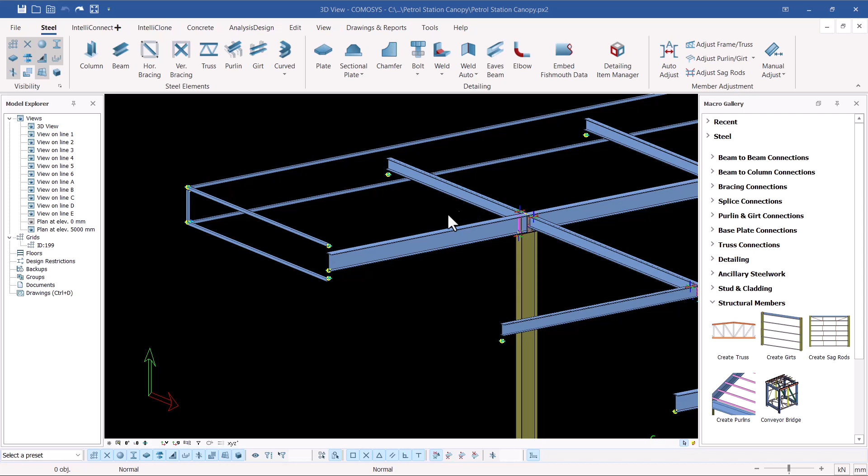Hello, welcome back. Today we want to create a girt along the edges of this simple roof of our petrol station canopy. This girt will just offer support for the roof trimming facade of this simple structure. There's still a lot to be added, but I'm just creating the profile to trim the edge of this particular shade of the petrol station.

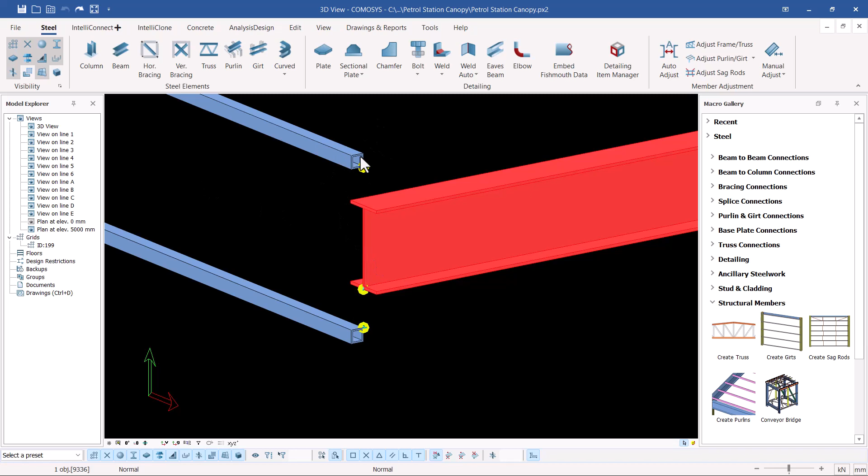I had created this previously, and it's quite easy to create. To create this, there are many options. You can just create this member at the center, then offset it with half the distance of this, then again the half distance of that going downward.

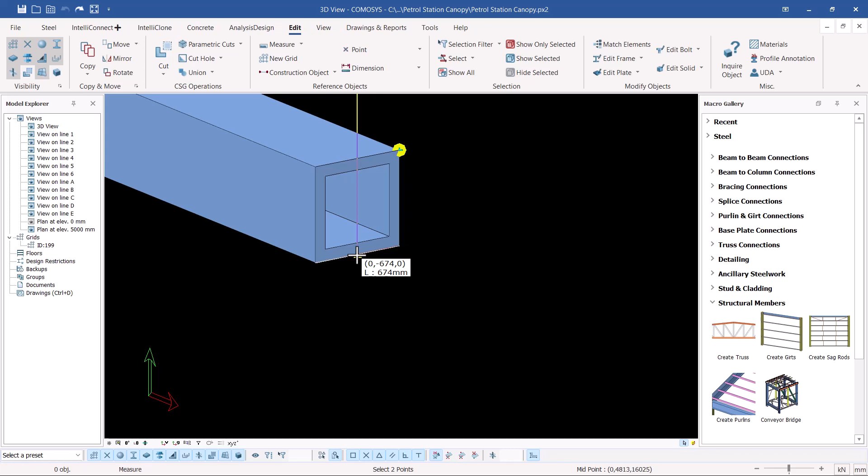Let me show you the distance here. If I come to edit and come to measure, and pick on measure distance, I'll snap on top of this member and move all the way to the bottom end, just to snap over, mouse over any point there, and you'll see it is 674. So this is the distance I'm talking about, that if you offset it by half that 674, you'll get to this position, and you'll get to this position.

You'll do the same to the other end, and this should be something you should be checking back and forth. That's why I did it beforehand, because I'm trying to cut down on training time.

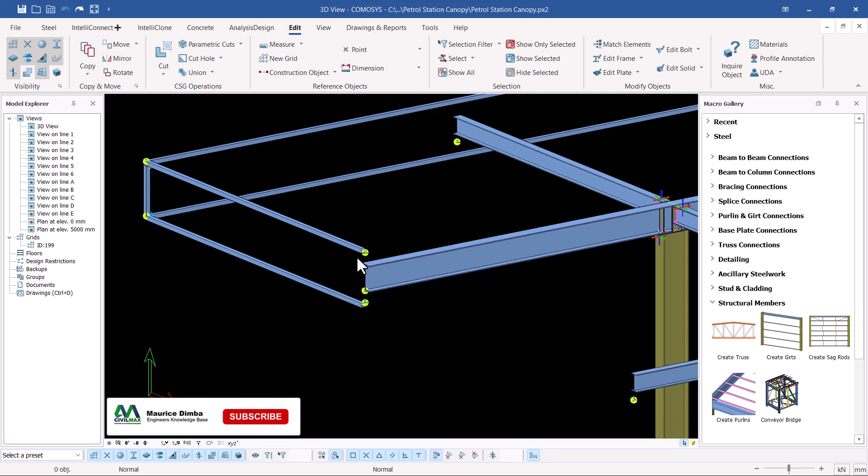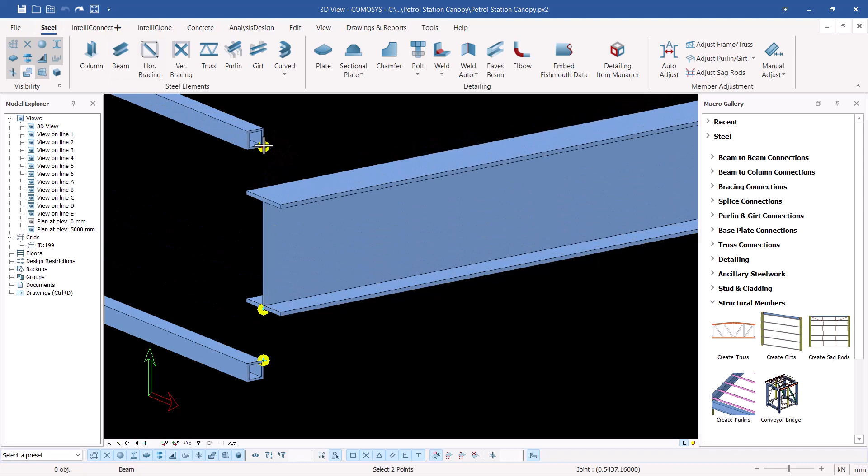Now there are two options. I can join these two frames by using the edit tool and coming to join frames, but I've used that several times. So there's also another way of doing it if you're a beginner - you can go literally and come to steel, come to steel beam, and snap on that node, then come all the way here and connect it manually like that.

As simple as that. Come here once again, select it, and reposition it by pressing Ctrl W, and everything is done. So if you select it once again, right click and come to special copy, pick on linear. This time you can see the location of our XYZ axis.

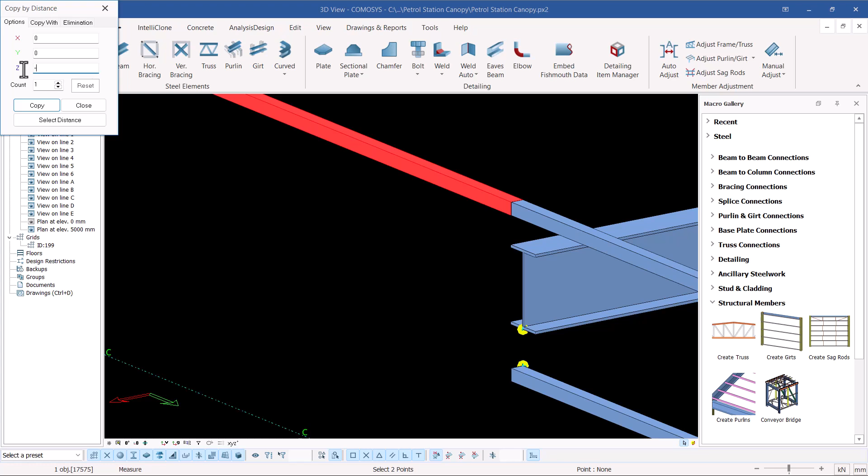It is in the wrong direction, so I can either work with the Y axis, or I can just take my axis to global position. I'll click on global, change that to 0, then come to the axis and feed in my distance by prefixing 674 here with a negative sign and click OK.

So once I've clicked OK, I forgot to subtract the 50, because this is a 50 by 50 by 6 millimeter thick member. So I'll select that and take it up, move it up by 50, just take it up by 50 so that we land and they become collinear - they line up that way.

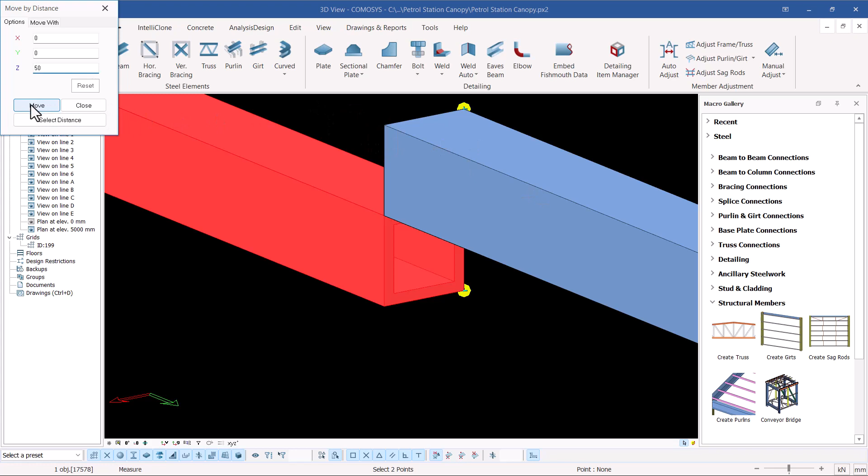Let me go ahead and click move. So if I click move, I have my members in place and in line. I'll select this once again, right click, come to special copy, and pick on mirror.

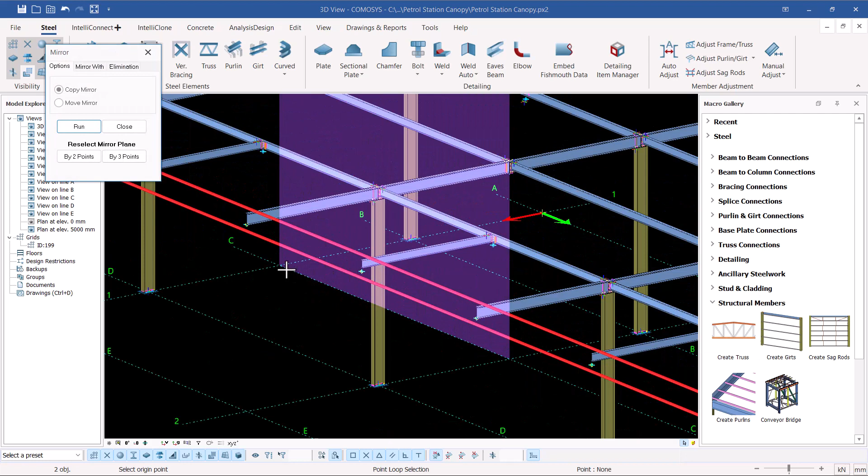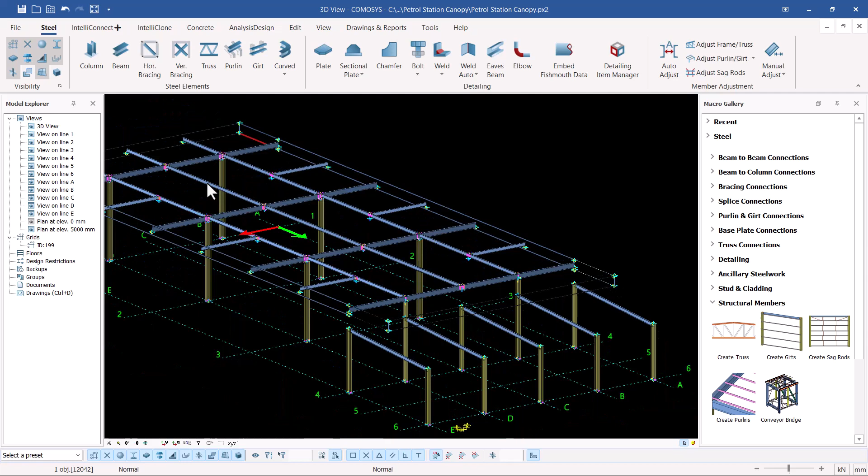I have to define my mirror line, and by good luck my mirror line is in place, and the mirror line should be the midpoint, so when I invoke this command, these components will land and connect accurately with these ones. If I go ahead and click that, you'll see I've joined those - I've joined with these components, with these members, and also these members. So our connection is complete. That's how we do it.

Now if we take a closer look here, if I zoom out, you can see if we lay iron sheets here, this member will be sagging, or when you're doing erection, it will be wobbling - there's no stability there. So what I'm going to do is add another secondary member here, just to make this more rigid, so when doing the erection it shouldn't be something to worry about.

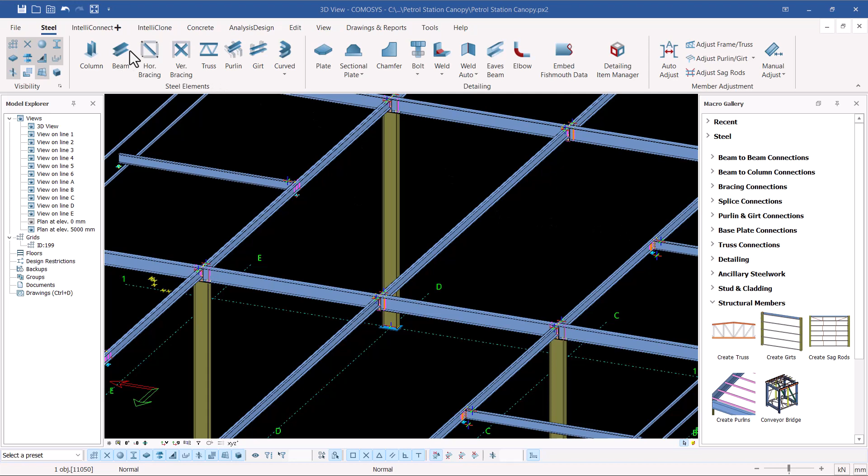Now I want to add this member here because we forgot to add it. So what I'm going to do is click on that and mouse over here, just to snap on that spot, and move all the way and snap on this spot here on the nodes there.

Right click and interrupt that. And it's picking this member as a default because it's the last member I had used, and previously I had assigned it as a default profile. So the profile should be the same with this.

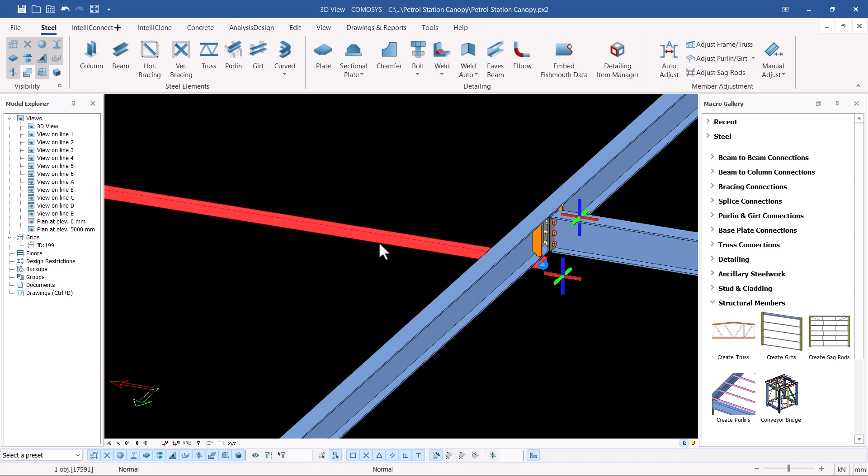So I'll double click on this, then from here I'll select and copy this. I'll close this, double click on this member once again, and paste the profile here. Once I've pasted there, I'll just go ahead and click OK.

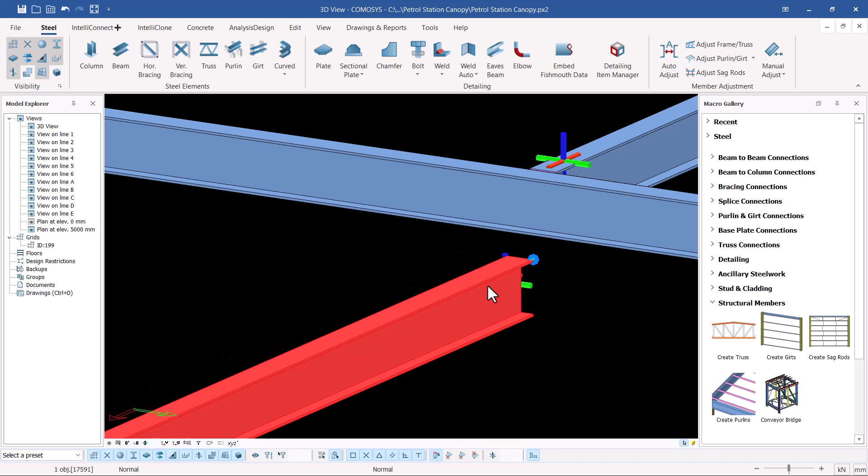And turn that round, rotate that, I'll come to Control W, apply, and double click once again there, and come to alignment here on plane. So under plane, I'll just type 100 and click apply. So if I click that, I'll be able to place or align that with this member here.

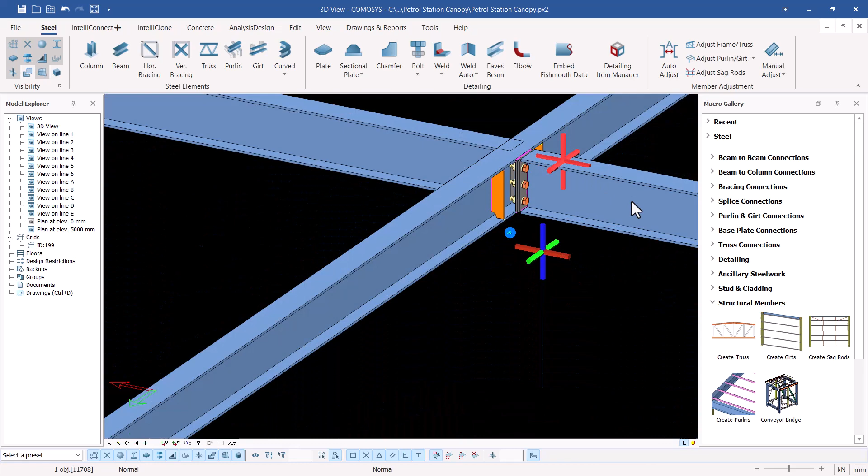So what is remaining, you can see one member colliding with this, so we have to break this in the middle here. So how do you do that? We come to edit, then edit frame, then break, and I select the member to break and mouse over here till I get a snap, and I've broken that into two.

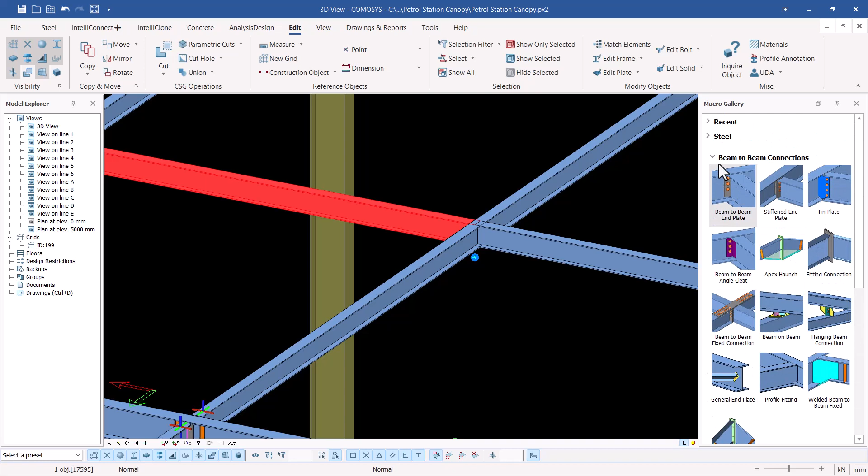So this member is different from that member. So whenever I want to create a connection, I come straight to beam to beam connection here, and pick the right connection. Let me come to that member, and I'll pick on this and try to apply this connection here, and that is what I'm getting actually.

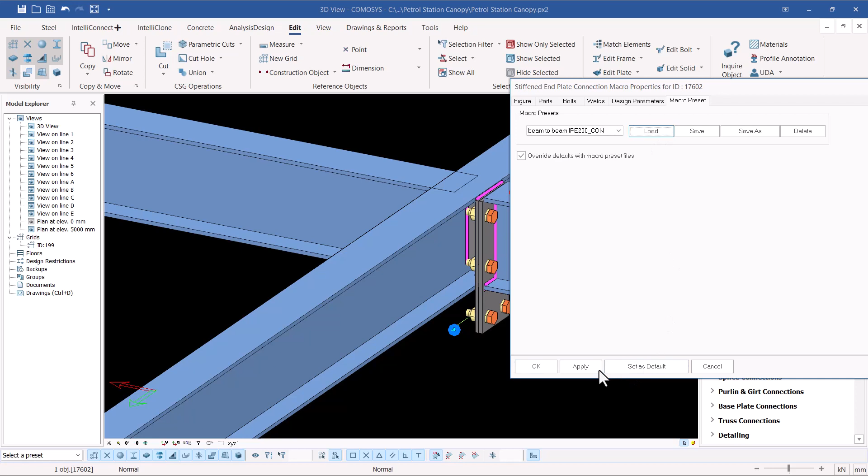And if I double click on it once again and give it some time to bring up the editor dialog box, I'll come to macro presets here. This is where you save all your connections. I'll come there and load my setting, click apply, and give it OK. So I've created a connection there.

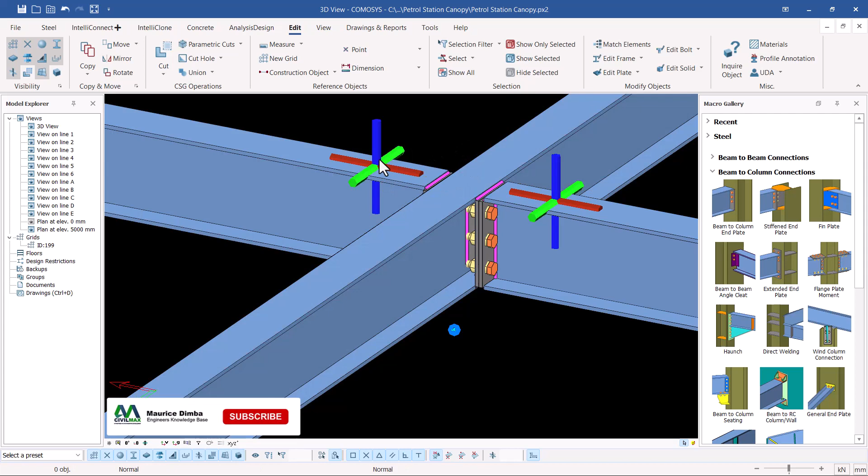So it's always advisable, if you double click and don't want to go repeatedly loading and doing that, just click this as a default setting. So whenever you create a connection, it will be picked as a default. So if I select on that, that will be a default connection on the other end, and I don't need to go back and load that. So I'll come back and connect that to that, and we have connection right there.

Let me pick the center of my rotation. I've picked this macro symbol, and I'll right click and hold my mouse and rotate my mouse like that, and I'll be able to see my connection has been created perfectly.

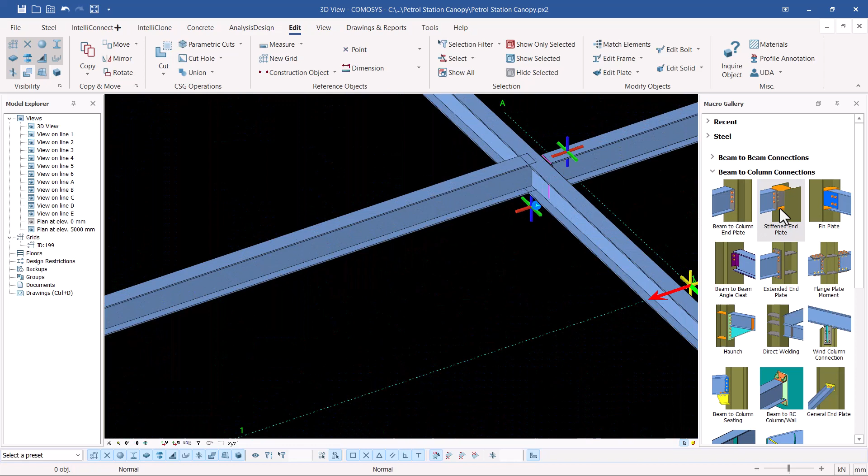So from here, we also need to add some stiffeners, because initially we didn't add them, but I had shown you previously how to do that. So that will be added behind the scenes, since I had shown you that before. So I can connect that to that, and we have that in place.

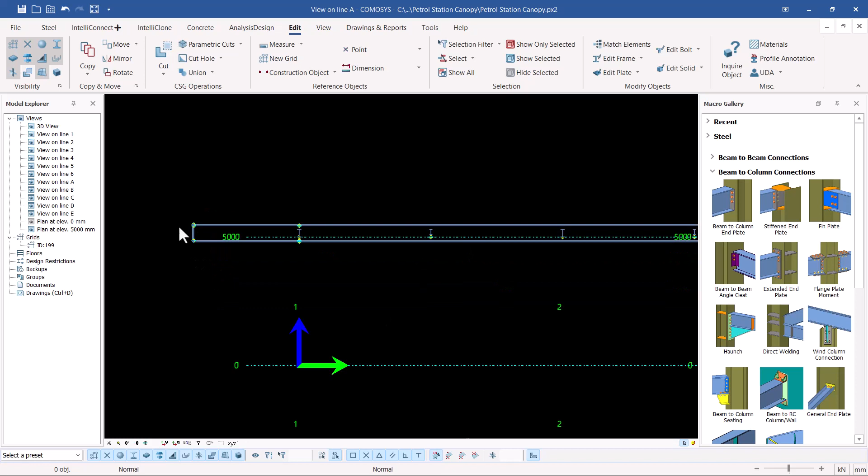Now we want to add some struts or members on the girder here. So how do you do that? We'll come to view line A and double click on that, and we'll have the sectional view of this girder. So we want to add struts inside here, just to make it more rigid. I think we can do that in the next presentation or in the next series.